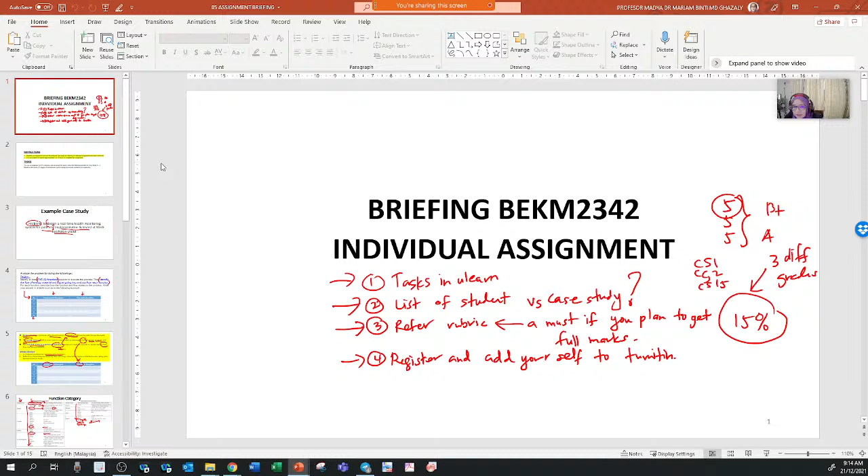So if you look at the example, in the case study there are roughly about 10 case studies. This is one case study I'm going to show you as an example, which is: the problem is to design a real-time health monitoring system for patients, implemented and tested at Klinik Kesihatan UTeM. Apparently, this problem was given to my IDP student, integrated design project student, third-year student last time, before COVID happened.

So basically what it does is I ask the student to design a health monitoring system for patients, which is when they go to Klinik Kesihatan. When a patient normally goes to the clinic, what do they do?

They will check blood pressure, check your temperature, check your oxygen level, and so on and so forth.

So what I suggest the student to design is a system that, when you do all of that measurement, it will automatically be compiled under the patient name. So directly you have a history of data, meaning the clinic kesihatan has the data of everything under the system. So the doctor doesn't need to key in manually and so on. They just put their hand in the blood pressure monitoring, and directly that measurement will be saved to the system.

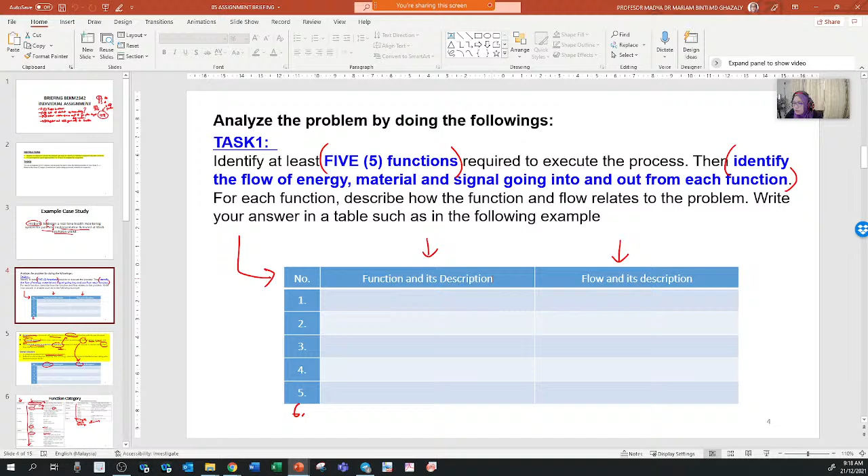So you have a table right here, with a function and description, and flow and description. So basically, if you look at this, okay, this is some explanation.

So what it means by systematic design is that you're not just going to simply design something without organizing your thought, your idea. You need to do it systematically.

Represent all the technical system as a transducer interacting with the world around them. So basically, when we talk about mechatronics, it's about having a sensor that can detect an output. You need to have a sensor, for example light sensor, motion sensor, or temperature sensor, so you can detect the temperature.

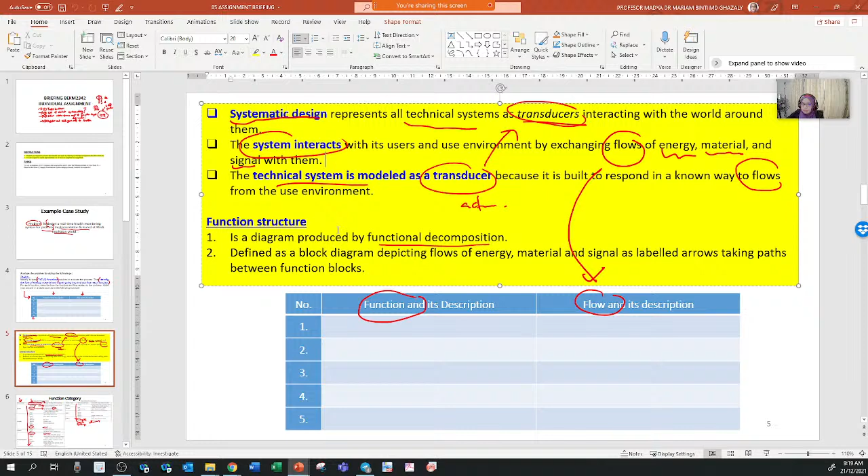So the system interacts with the user and use environment by exchanging flow of energy, material, and signal with them. So all of this is going to interact with each other, and the technical system is modeled as a transducer because it's built to respond in a known way to flow from the user environment.

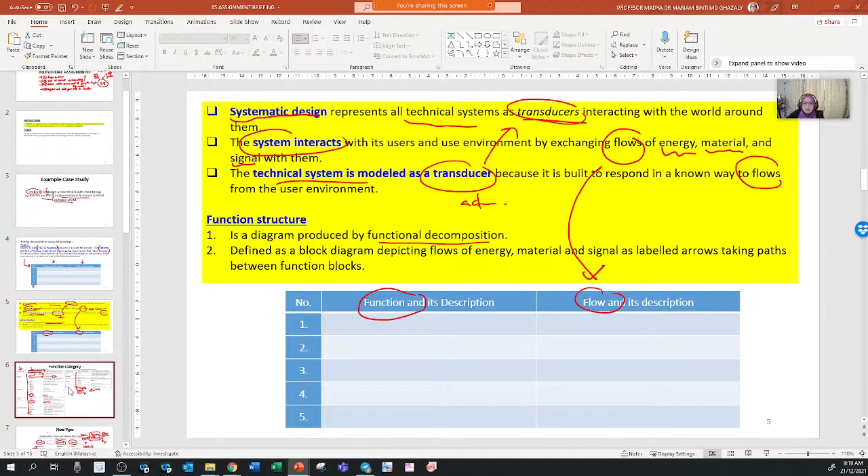So the function structure is a diagram produced by functional decomposition. So basically, what you're going to do is come up with the function and its description, and the flow and its description. So what is it?

So under the class name is like a general term, a general function. And then you have the sub of that class. So you have the basic function name and you have the alternate wording of that basic function. So, for example...

You want to actually convert something, rotate something. So rotate is under the class function of channel. For rotate, another basic word for rotate is spin or turn. So when we talk about rotate, we're talking about actuator. And when we talk about actuator, the actuator needs to start, initiate the actuator movement and so on.

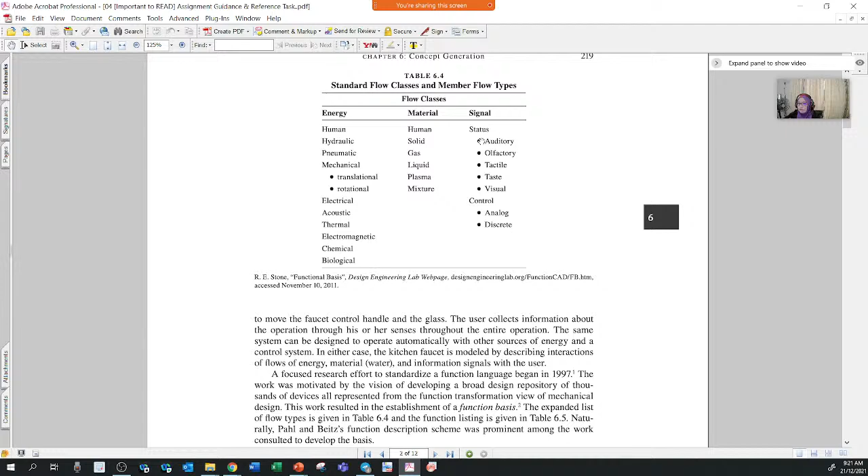So you know there are a few examples of flow classes. We haven't entered yet the type of flow. You'll see that there's flow: energy, material, signal, and so on. And we talked about function just now here.

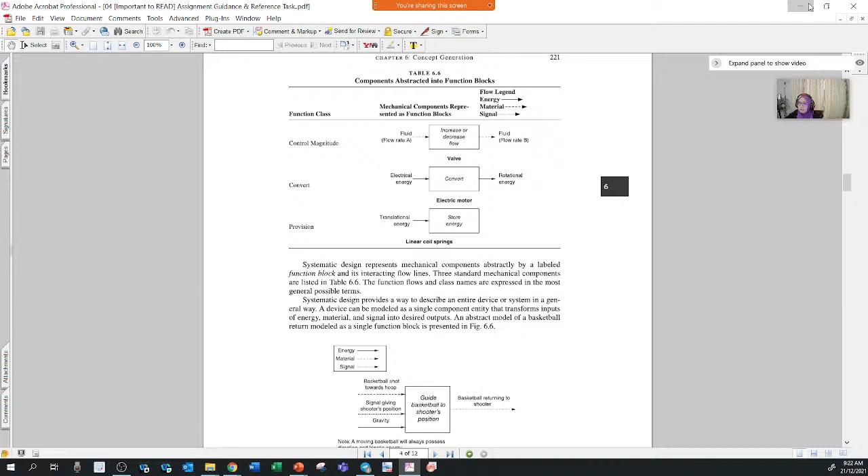So here is how you're going to design the function block. You have the flow just now, and you have the function. Function is the input-output. It's going to move and so on. This is just a brief on function category.

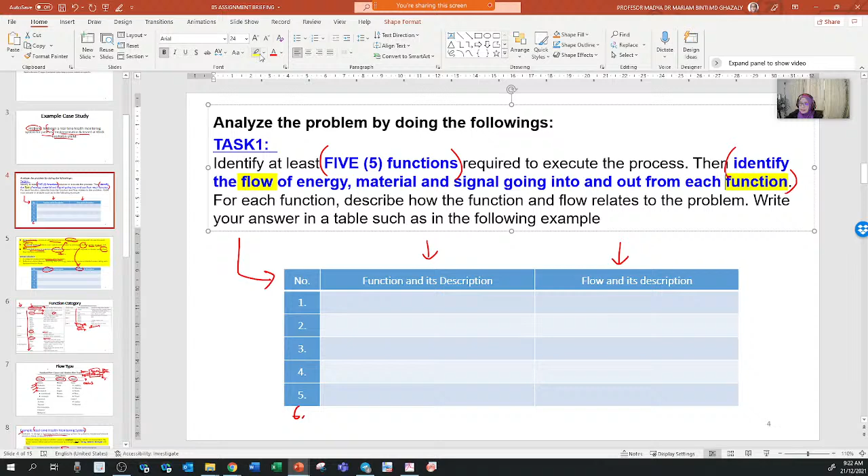And flow type, as you see in the question, is to identify the flow of energy, material, and signal going in and out from each function. So basically you need to determine what is the flow, what type of flow you need, and what type of function you need. So flow is this one, function is this one. What is function? What is flow? Flow has three different examples: energy, material, and signal.

For energy, an example is the one you've learned on actuation. So you have hydraulic energy, pneumatic energy, mechanical energy, and under mechanical you have translational and rotational energy. Electrical is also energy, acoustic which is on the ultrasonic, thermal, temperature, and so on. So all of these are energy.

Based on that, you might have the material. For example, for hydraulic and pneumatic, the material that you are going to have as input and output is gas, compressed gas. For hydraulic it's compressed liquid. So those are the things you need to understand, that there's a relationship between the energy and the material. And the signal is normally the one that you receive from the output from the actuator or sensor. So what is it? Is it tactile, visual, or auditory? Determine that.

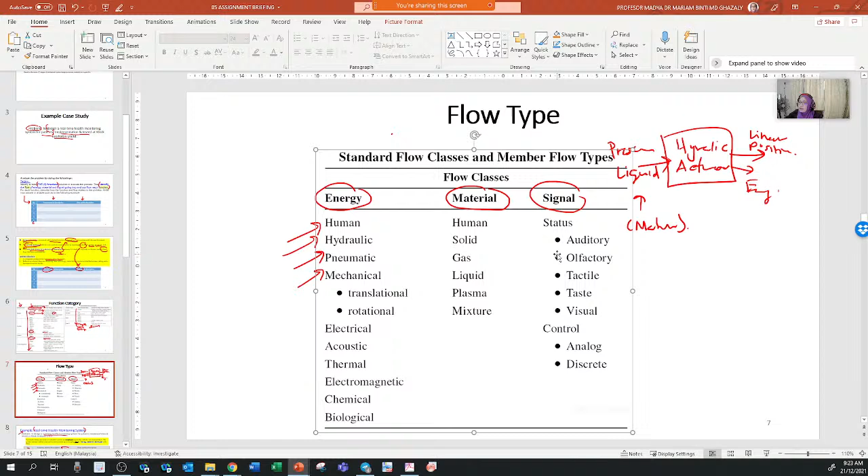So let's look at the example just now, case study: real-time health monitoring system. So what you need to do is determine the function. When you talk about coming up with the function, it's related to the measurement system, actuation system, and control system.

For example, in order to detect the blood pressure, what sensor do you need? Do you need any signal conditioning? If the signal is too small, what do you need to amplify it? And data presentation - what do you need to actually monitor the data? You need a display, or for example, the raw data you can collect later and plot it as a graph. So measurement system, data presentation.

And for the actuation system, for example, in the case of this case study, mostly there's no actuation system. So actuation system, we have that - we have the pneumatic.

Okay, since you have the blood pressure, you know that you are going to pump it and then make sure it's going to grip your hand. So you have the pneumatic actuator there, and compress the air. And next is control system. So you need a control because the blood pressure machine needs to control - basically, when it detects the maximum, then it will stop and calculate the blood pressure.

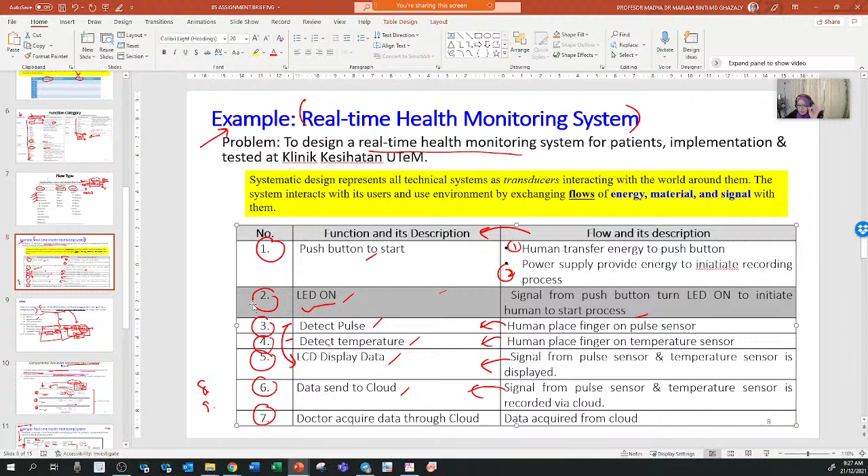Okay, and so based on that, the second question is to design the functional block diagram. So design the functional block diagram.

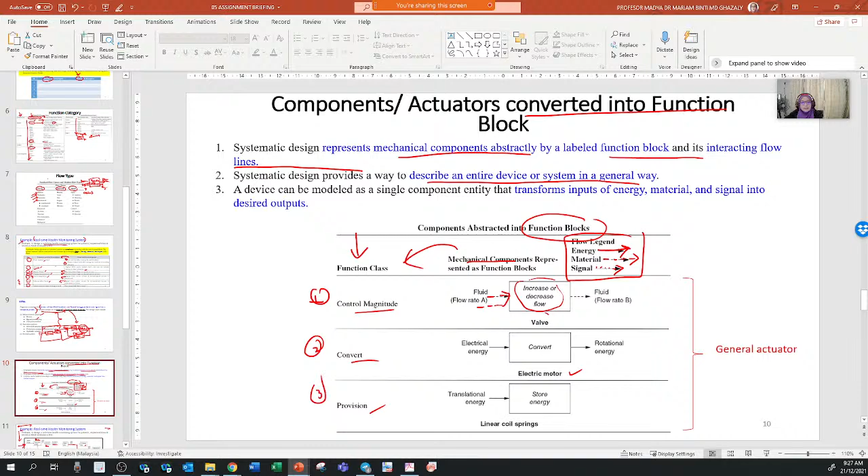If you look here, I'm not going to explain it fully, but you need to read through the PDF that I gave you - read it all until finished, all 12 pages. After you read through, you will understand how to actually come up with the block diagram later on. So this is one. Next is, after you draw the block diagram for the individual block diagram, then you're going to draw the full block diagram. Full block diagram is after you combine everything.

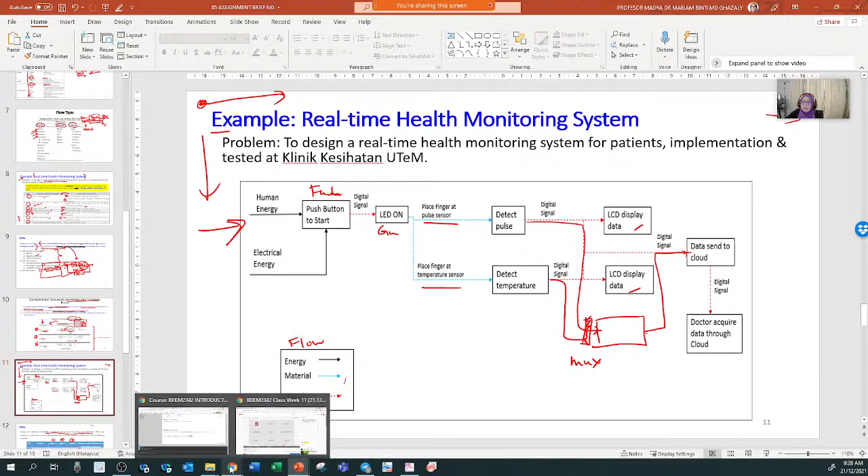Okay, so same goes for this example. Actually in this example, you see that initially they draw the block individually like this, and then later they combine it into this large block diagram. So this is how you need to represent the block diagram later on. You can draw it one by one, up to you, and then you can combine it and come up with the combined block.

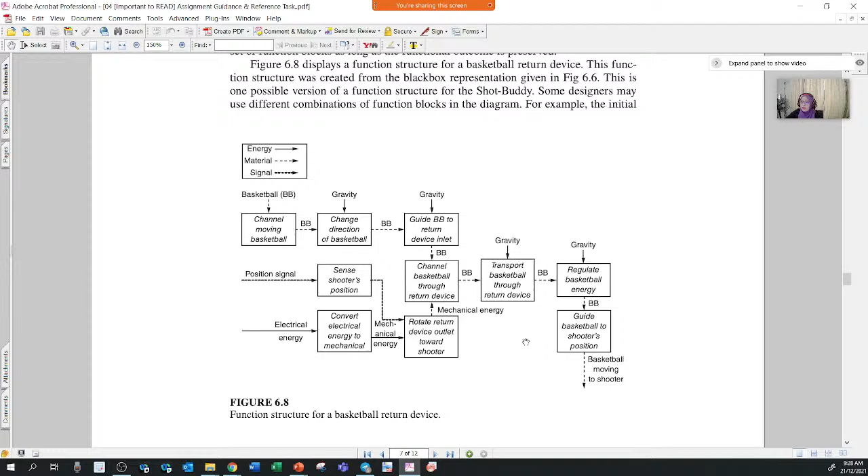Okay, task number 3 is to analyze the suitable mechatronic component to perform each function. So when you are answering this question, it's going to reflect to task 1 and 2. That's why task 1 and 2 is important, that it needs to reflect to what we have learned.

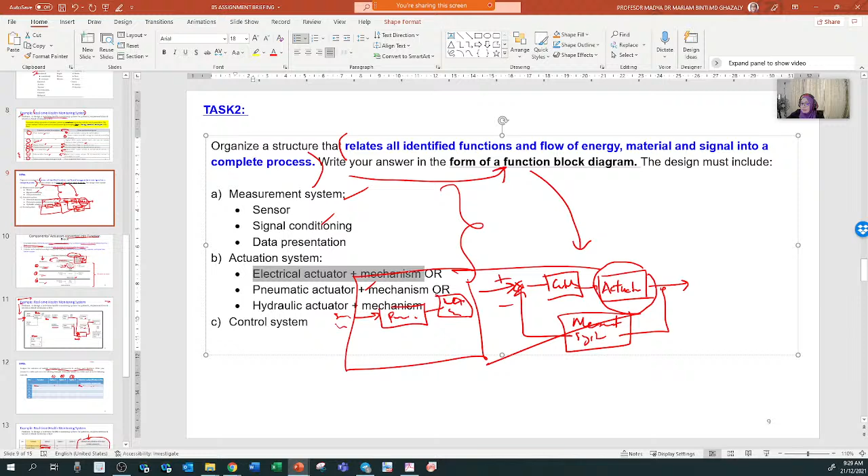So option 1, 2, and 3 is basically the option of example - option of sensor, what type of sensor you need to use, or what type of signal conditioning you want to use, or what type of data presentation, or if it's talking about actuation system function, then what type of actuator you are going to use, plus the mechanism. Don't forget, in the actuator system, you always need to combine it with mechanism - so think of what mechanisms are required.

Okay, and after you list all 3, then justify between 1, 2, and 3, which one is the best and why. Don't answer which one is the best because of cost - don't take into account the cost or the price. Take into account why it's important in terms of the sensor or the structure of the component.

For example, if you talk about a sensor that can detect obstacles, you might want to have infrared sensor, ultrasonic sensor, or light sensor for example. So which one is the best? Why do you think it's the best? You want to explain that.

Maybe it's because of the material of the object. For example, if you have a water bottle, can an IR sensor detect this obstacle? Does it reflect or not? Think about that and justify it. You can talk about the material. Perhaps suggest that if it's a different material, it's best to use an ultrasonic sensor.

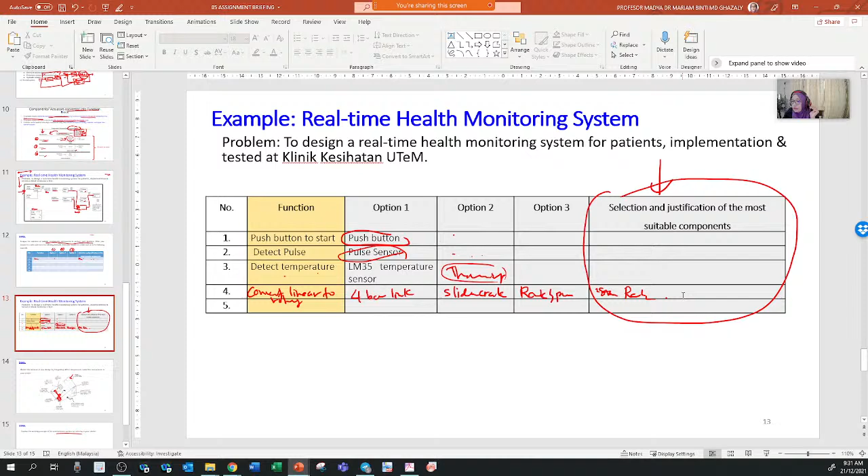This is just an example. If the function is to convert linear to rotary, that's number 4 - ignore 1 to 3, I'm talking about number 4. So do you want a four-bar linkage, option 1, or do you want to use a slider-crank mechanism, or a rack and pinion? Which one do you think is best for your system or design?

Task number 4 is that you are going to draw out the component. Let's say you have all the components - you are going to label everything, where the sensor is and so on. If there is a mechanism involved, draw out the mechanism, and also draw out the actuator if you have one. It needs to be clear how the actuator and mechanism are connected, so your design is clear.

The reason this is important is that in the final exam the question will not be similar, but if you manage to answer the assignment, I'm sure you will be able to answer the final exam later on.

Lastly, task number 5 is to explain the working principle of the system. After you have designed it, explain everything about the options and sketches of the design, then explain the working principle. You can explain it using numbering - number 1, what does it do? When the sensor detects this, the actuator will do that, and so on. You explain it based on task number 4.

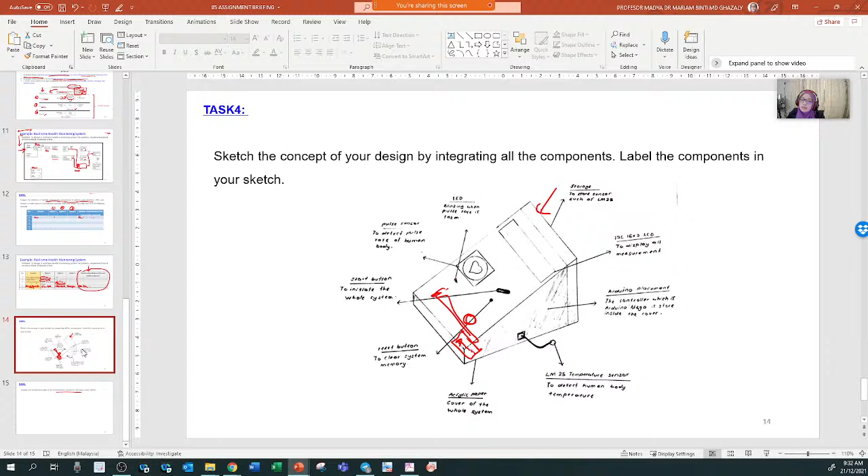So, any question? Any question? No? Hello? Okay, no question, then it's okay. So everything is clear.

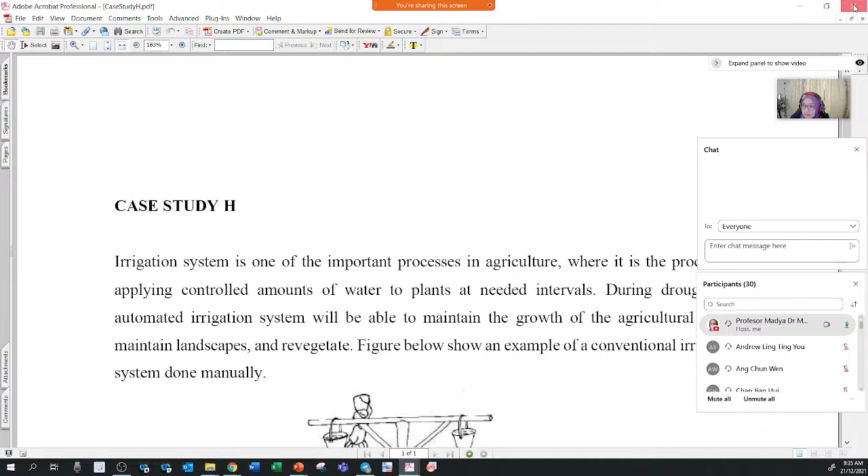Because the question is, of course, if we give you the case study, for example... let me see. Okay, remember this example? I think you've seen it before - I shared it in class during week 1, 2 or 3. I gave you one case study and also a video. This was actually taken from my final year project student. He did a project designing a wearable automatic lower limb rehab system. So the case study is doing that.

So what you need to do is make the system have the following specification.

Okay, so you need to have the mechanism where at the sitting position. Why is it important to explain that? Because I don't want students to think the patient is going to stand up and do the exercise. No, that's not the idea. The idea is that the patient needs to rehab their lower limb, so they need to sit down and do the exercise to the foot there.

Okay, and of course the wearable system must be light, but that's just additional information. The important thing when you look at the requirement is to think about what are the sensors, what are the measurement systems required.

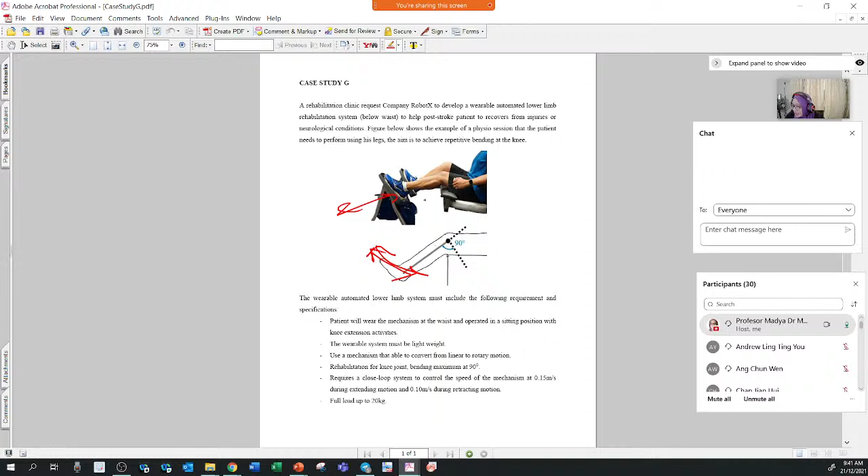This leg will move up like this, in an angle of 90 degrees, so it's going to rotate 90 degrees. Even though it looks like it's doing a linear motion, we are not talking about linear motion right now - you need to follow the requirement that's being asked.

So read carefully, and when you read the case study, imagine that you are the person or the patient, or if you have another case study, then you are the person that has the problem and wants to solve the problem. So what type of sensor and actuator are required? In order for you to do that, you need to be able to explain the working principle of the system overall.

So just now I explained that I'm going to push my foot at an angle like this, rotation. It's going to rotate 90 degrees like this, with the speed of the value given. So it does rotation. You know that for stroke patients, they cannot control their feet because of the stroke, so the machine will help the muscle to actually rehab and improve itself. That's why it's very useful for rehab patients.

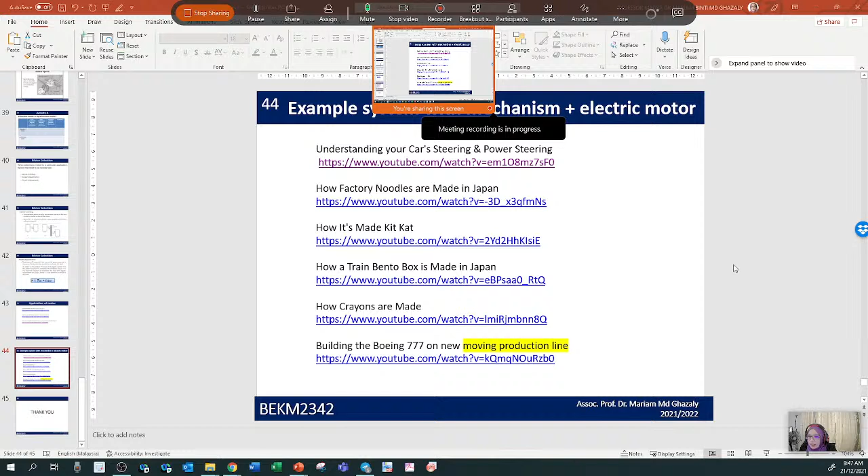How it's made. I'm not sure for you guys, but I like to watch documentaries at home. I have Astro, I don't have Netflix. I haven't even finished watching everything on Astro. But I like to watch documentaries, most of the documentaries are how it's made, big machines and so on. So I hope you guys are also similar, being an engineering background, you need to have that passion of watching all those types of videos. If you don't have that passion, I'm not sure how you're going to work later on, because you need to understand, maybe you're not going to work in that field later on, but you have an idea of how the mechanism works.

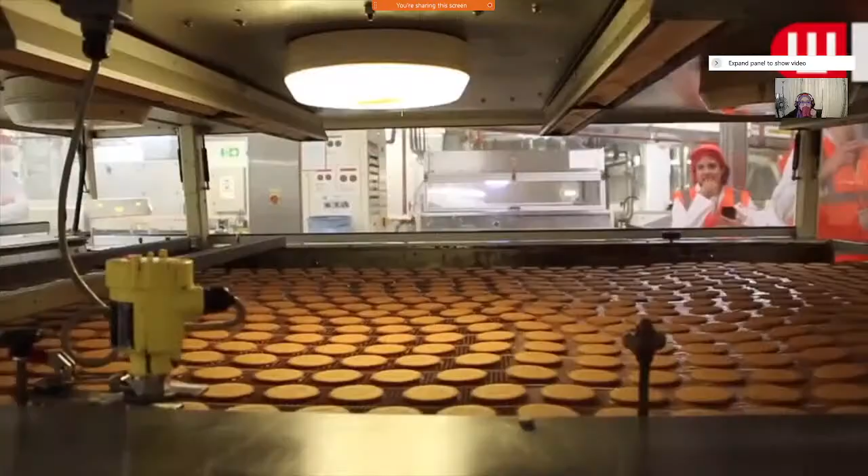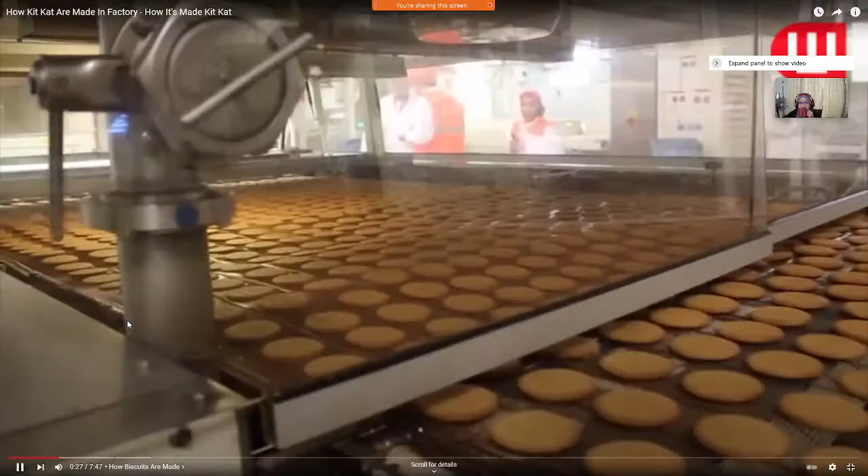Ni biskut. Sorry. Macam mana pula? Biskut dah. Okay lah. Memang biskut pun.

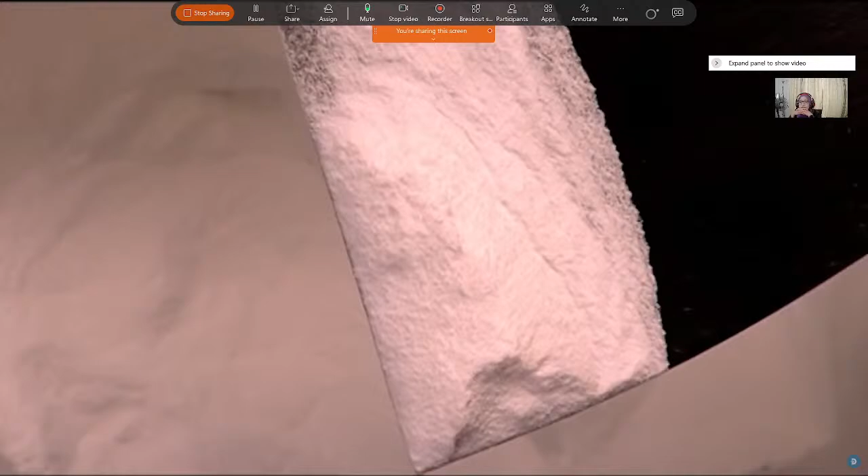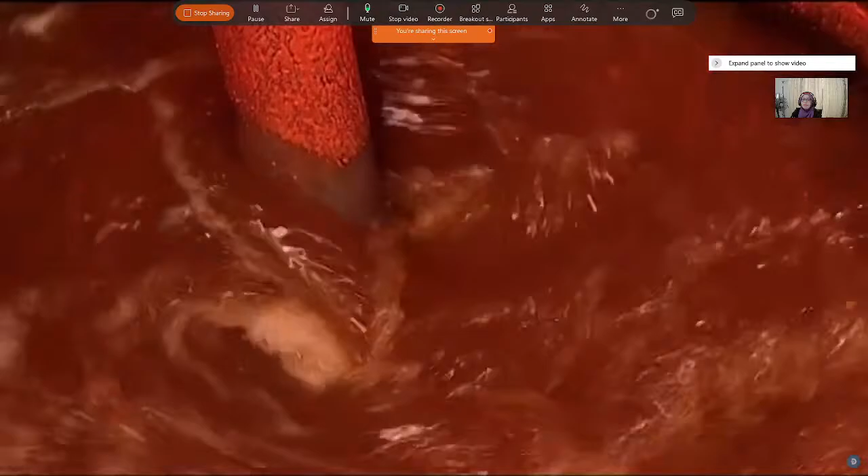These crayons are made from a combination of waxes, primarily paraffin, which is ideal because it's inexpensive and easy to melt. It also has a nice rub-off, meaning it leaves enough wax on the paper. The wax is melted to 62 degrees Celsius. Then a secret powder is added to strengthen the crayon and act as a filler, boosting the number of crayons the wax will produce. Various synthetic chemicals are also added: one to keep the wax from sticking to the mould, and a fatty acid called stearic acid to improve the rub-off.

Now the wax is tinted. In this case, the addition of yellow and red produces orange crayons.

Okay, a tip when you watch this type of video: try to think about what type of actuator is being used, what type of mechanism, what type of sensor, okay?

This factory can produce 127 different colours. Every ingredient in the crayon is non-toxic. After adding more wax, the mixture is blended for about 45 minutes.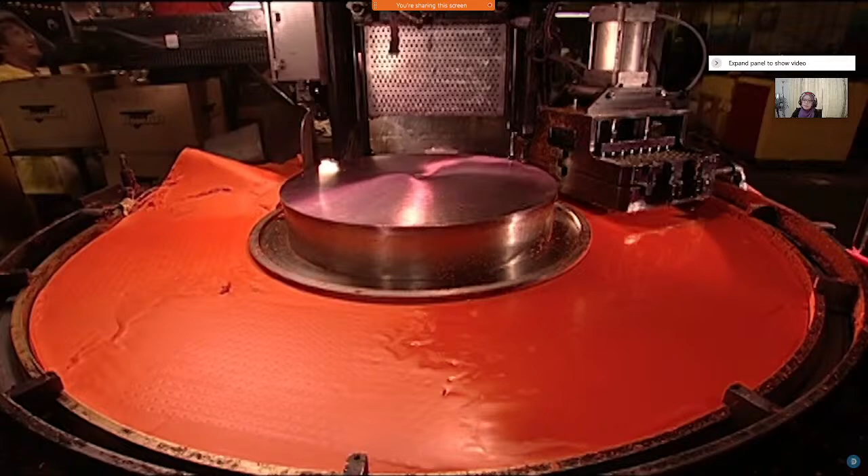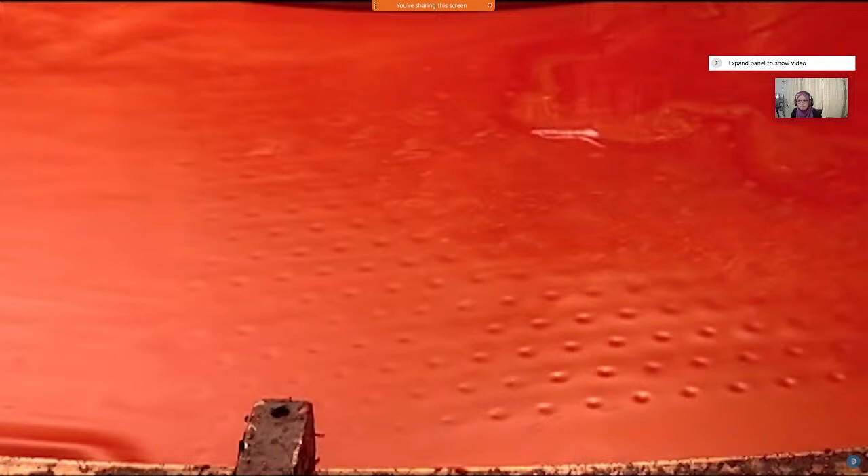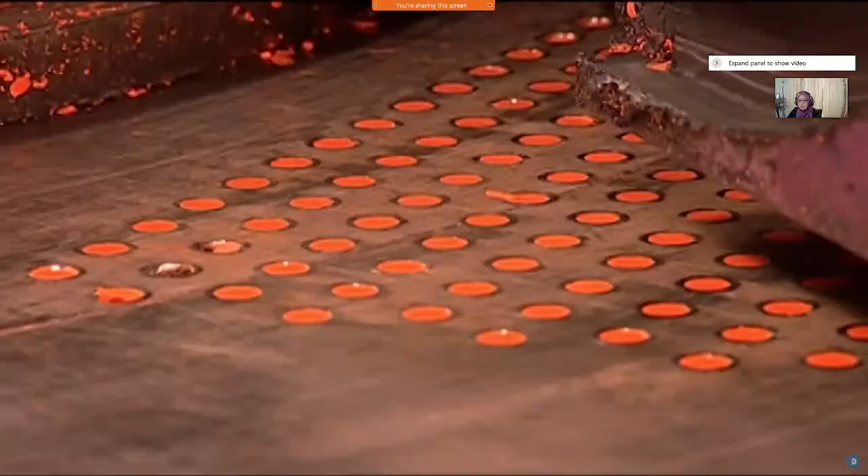Now the wax is pumped into this device, called a rotary machine. It first injects the wax into crayon-shaped moulds. Then it envelops the moulds in cool water, hardening the wax within 60 seconds. As the moulds continue along the circuit, a blade scrapes off the excess, which gets recycled. Just one rotary machine moulds more than 2,700 crayons per cycle. With several machines operating simultaneously, this factory churns out 30,000 crayons every hour.

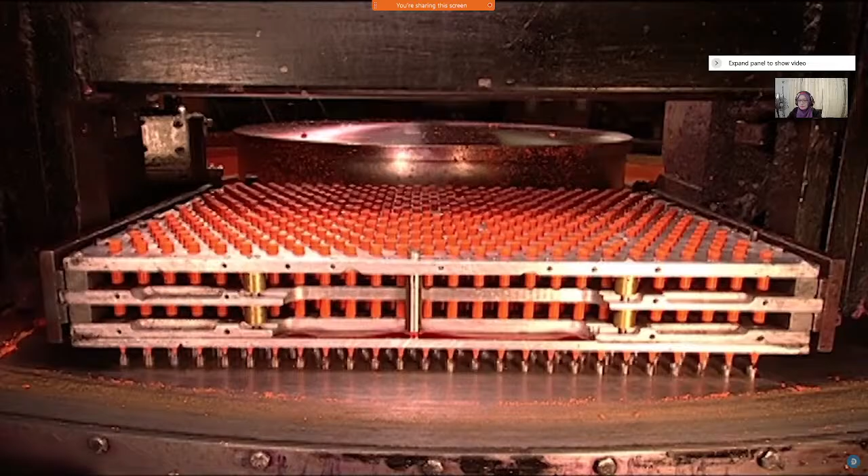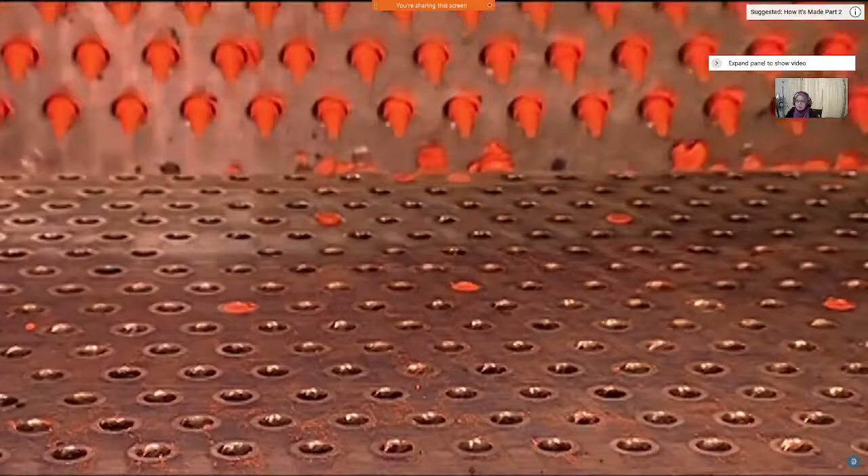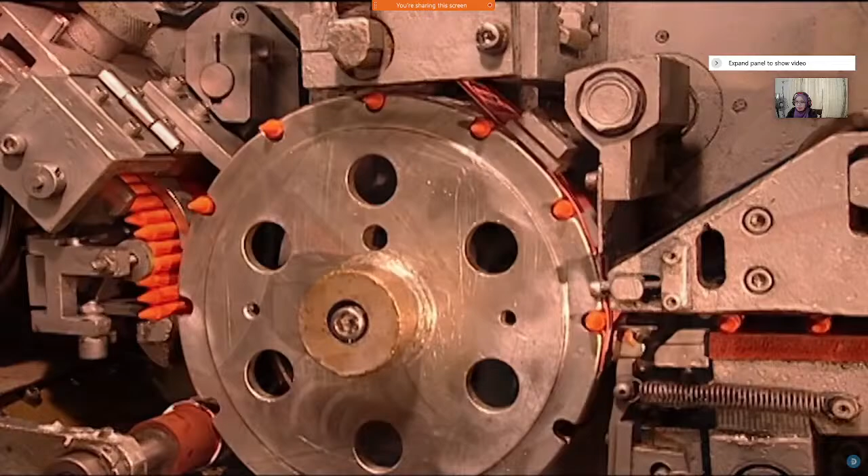The machine ejects the crayons, and a conveyor transports them to the labelling machine. Look at what type of mechanism, what type of actuator is being used. One by one, they drop into the grooves of a revolving drum. At the bottom, glue coats the surface in between the grooves, just before the crayons go in.

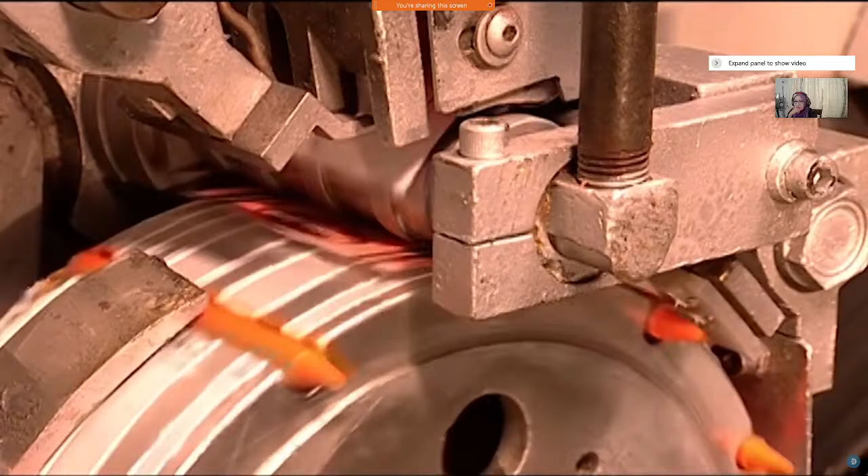The machine then slaps a label onto each crayon. A roller presses the label against the adhesive. Then a small arm wraps it around the crayon. This machine labels 8,500 crayons per hour.

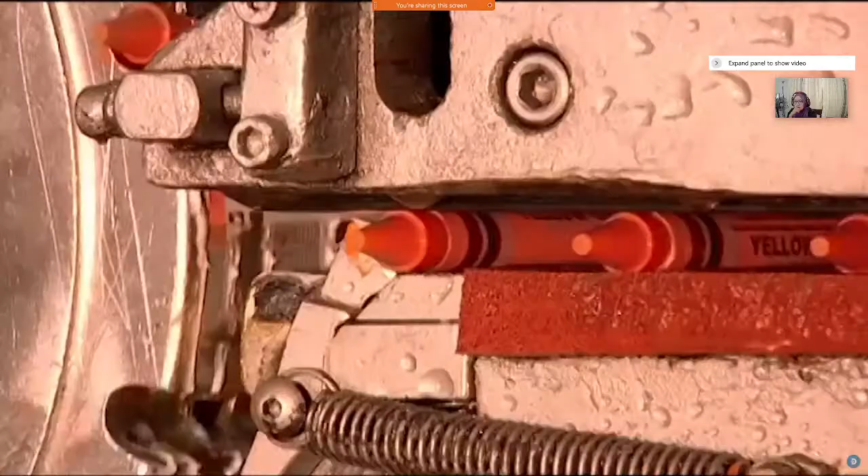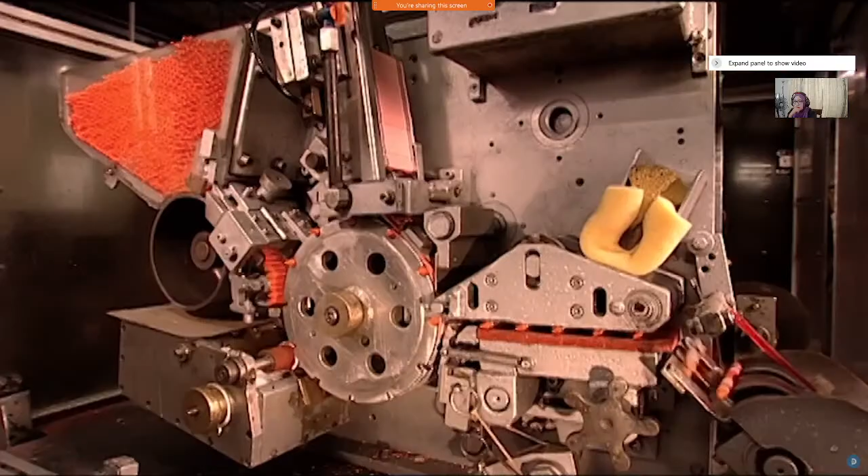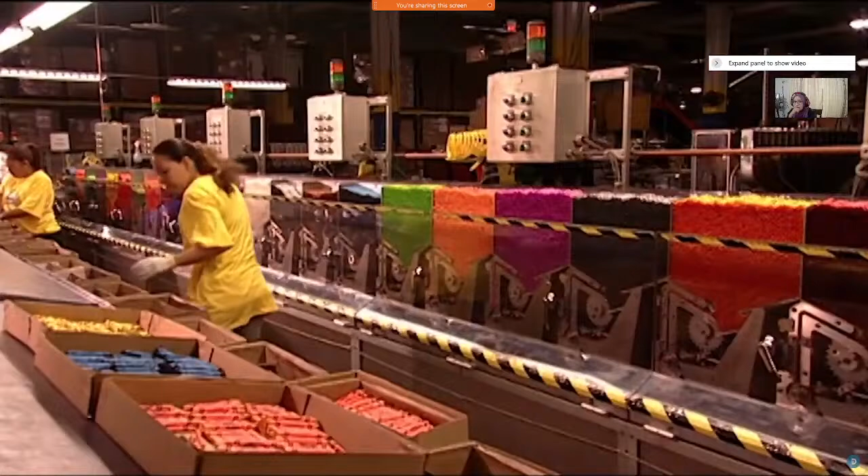The crayons exit the labelling machine and land in a box. They're sorted according to colour into the appropriate hoppers of the packing machine.

The packaging line is entirely automated. The factory programs the machine to collect a certain number of crayons in specific colours, according to the type of packing production you need to have. A sensor is used to count. Best sellers are packs of 16 and 24.

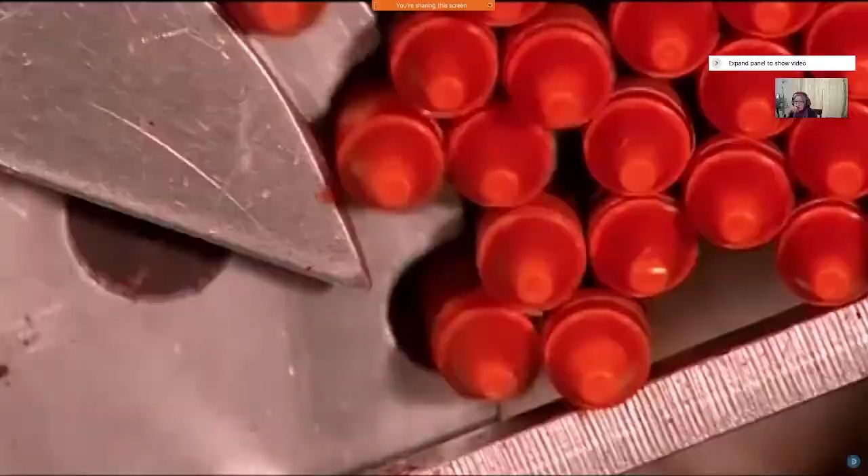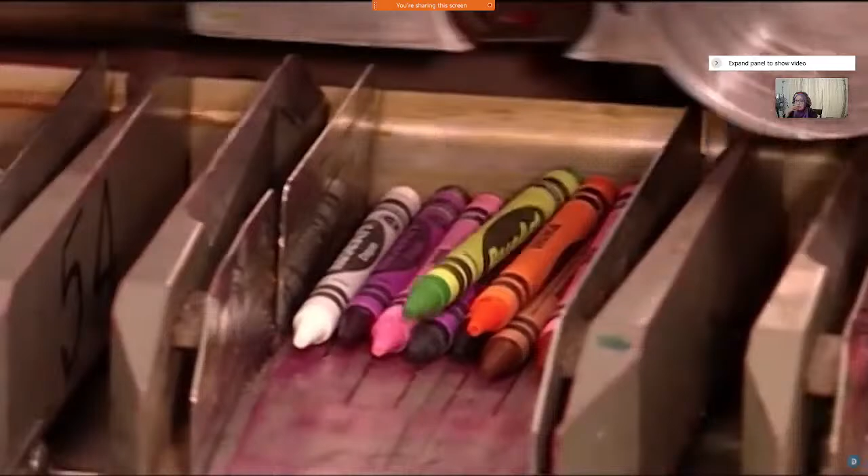The packing machine is designed to handle the crayons gently. Occasionally, though, a crayon does crack or a label comes loose. When that happens, a sensor automatically stops the machine and a light goes on above the problem hopper. The jam is cleared, then production resumes.

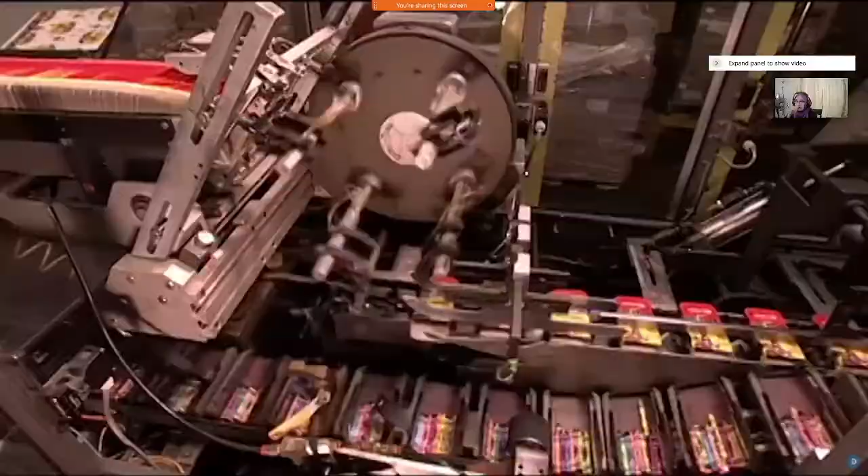Once the count is complete, the crayon line and the box line meet. A pushing device slides each set of crayons into a box.

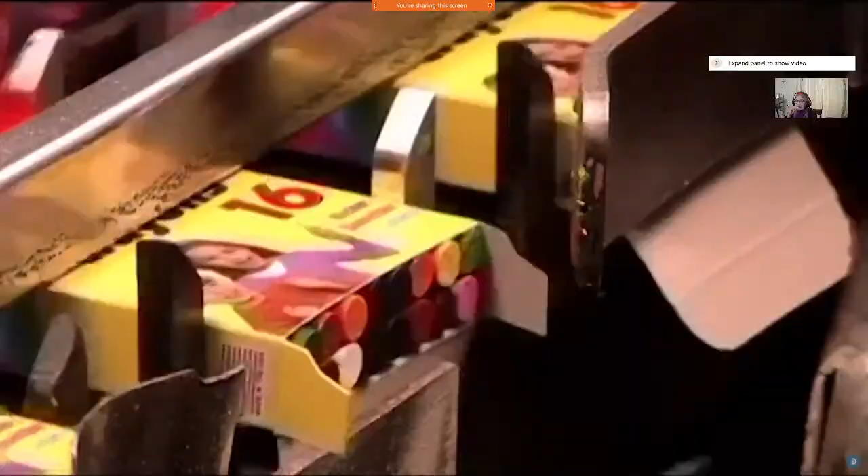A built-in scale weighs every box. Should one be underweight, the machine automatically blows it off the conveyor belt. Then the missing crayon is added manually, ensuring a full complement of colours.

Alright, so based on that video, lots of actuators. You can find that there are lots of actuators being used. So what do you think? What are the actuators being used in the video just now? You can write that in the chat. What type of actuator, not the mechanism, actuator only first. So what type of actuator do you think? Write that in the chat.

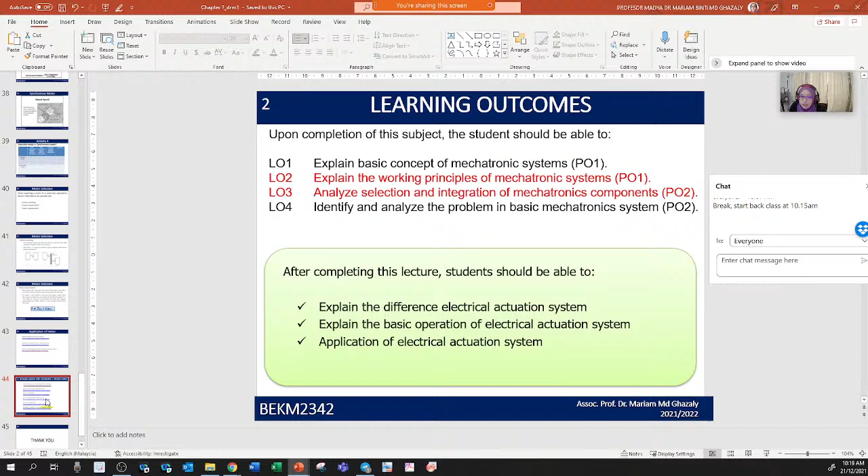Types of application that I mentioned just now—one of it was the crane. A crane, most of them are hydraulic, but maybe it can use an electrical motor. It's up to the company to use, but most of the time they will need the torque. If they want a larger torque because of the molding process and so on, they prefer pneumatic and hydraulic. And the one that I showed, which is much more relevant, is power steering.

Power steering uses the mechanism plus the electrical motor. If it's normal steering, manual steering, you have only the mechanism. That's why without power steering, the car is really heavy—very heavy to steer. So if you have an electrical motor or hydraulic actuation in that car system, it's easier to actually handle the steering.

Back again to this—just a recap. You have covered the measurement system, and in the measurement system you have learned about the sensors, and also the signal conditioning, and also data presentation. So data presentation, where is it? Normally, data presentation is after the signal conditioning. So it might be that you are going to save the data, or you want to display it somewhere.

For the actuator system, you have the actuators—hydraulic, pneumatic, electrical—and you might ask, where is the mechanism? The mechanism is also included here under hydraulic, pneumatic, and electrical. And in order for the actuator system to detect the signal from the controller, you might have the digital to analog converter, or digital to digital converter. It depends on the system—sometimes you want to change the sampling time.

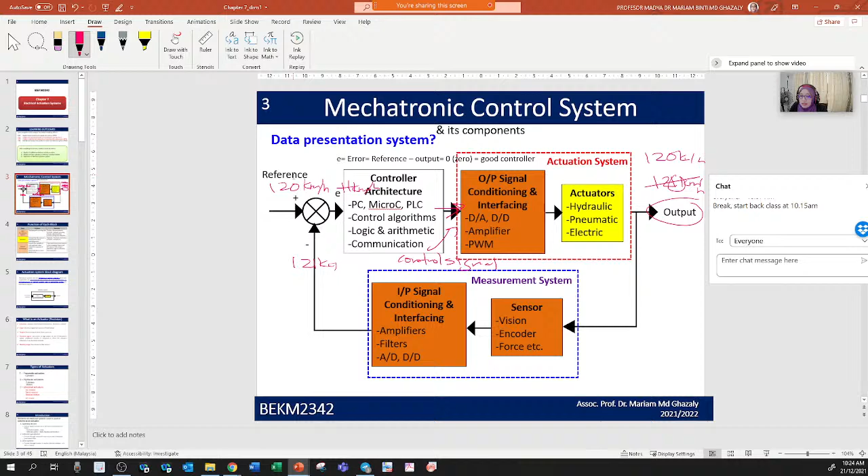So we talk about the input for a closed loop being the reference. We'll jump that part, just recap it, just read it.

So we go to this part: types of actuators. We have covered the pneumatic actuator and the hydraulic actuator. Now we are under the electrical actuator. Under electrical actuator, we are going to cover the 4 main components that we have. Of course, under this component we have other stuff also, like the brushless DC motor and so on. But these are the common ones people talk about, and as a student you need to understand the difference between DC motor, servo motor, stepper motor, and also AC motor.

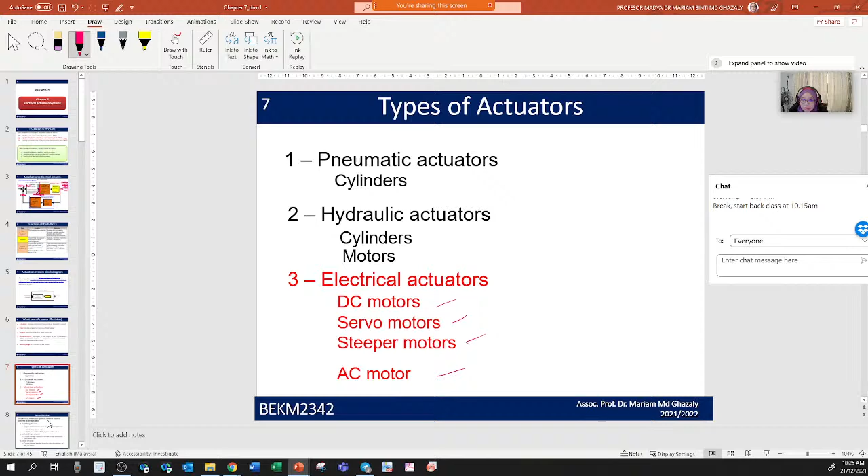So first, we go to the elements of electrical systems in control systems. We have three types of elements. The first one is switching devices. Switching devices are something you normally see in a simple system, acting as control signal switches to turn on and off some electrical devices. Example: relay using solenoid, mechanical switches, so it's going to control on and off.

And sometimes when we talk about relay, if you are going to learn PLC, programmable logic controller, they also have a relay but in terms of a program ladder diagram. That's why nowadays, when we talk about electrical systems, if you want to control something easier, you apply a PLC system, a PLC controller.

PLC controller, the one that you see, for example, in a washing machine. You have a PLC controller. In a vending machine, you have a PLC controller. And also traffic lights, you have a PLC controller. In Malacca, we have lots of traffic lights with countdowns. So when we have that countdown, you actually have the PLC controller automatically, because it's going to count down.

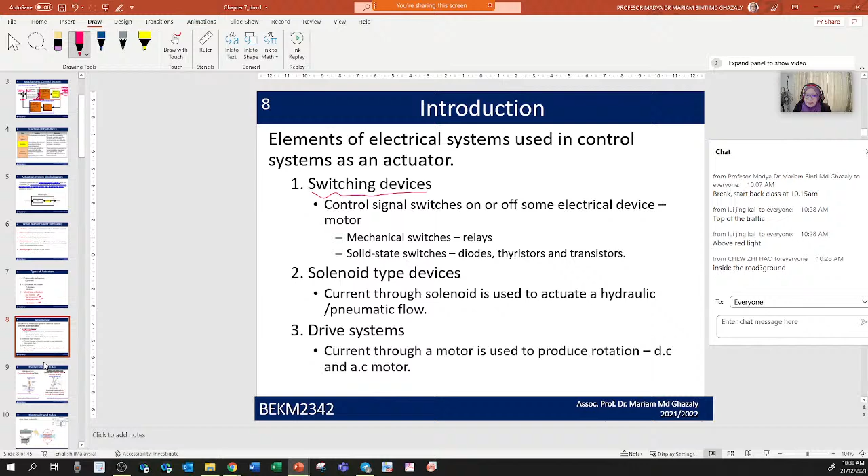The third one is the drive system, which is basically to make it rotate or move in linear motion. It can be DC or AC. Before we go too deep into the types - DC motor, stepper motor, and so on - this is just a refresher on the hand rules.

You guys can go watch the video, but I'll directly explain the hand rule. We have the right hand rule - most of you know this. It means that if you have current flow moving up, your thumb is the current direction. So you put your four fingers around the wire, making sure the thumb moves in the direction of the current. This means the direction of the four fingers is the direction of the magnetic field. That's the basic concept of the right hand rule.

Current versus direction. When we talk about actuators, it uses a combination of the right hand rule and Fleming's left hand rule. Fleming's rules have two types: Fleming's left hand rule and Fleming's right hand rule. What's the difference? You previously learned about Fleming's left hand rule, which is for the motor. For Fleming's right hand rule, you use the right hand but with the same three fingers, and it's for the induced current. So what does that mean?

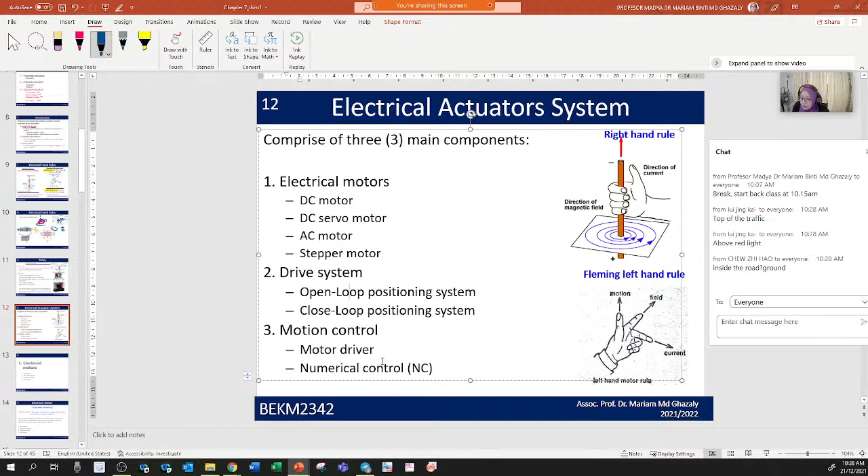And for the third one is motion control. So basically, you can either want to control the motor using a motor drive or a numerical controller like PLC, just now.

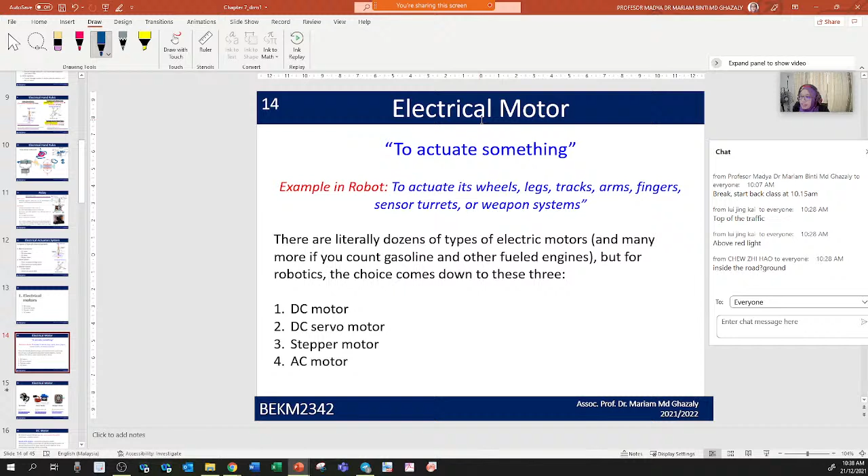Okay, so let's go to the first one, which is the electrical motor. So just read through it here. Electrical motor means that to actuate something, same goes to pneumatic and hydraulic. So these are the three main

motors that you need to know as an electrical engineering student. So you have DC motor, servo motor, and stepper motor. So, what is the difference? My question is here, okay, for DC motor, we have 2 wires.

For servo motor, we have 1, 2, 3 wires. For stepper motor, we have 1, 2, 3, and 4 wires. So, what is for DC motor?

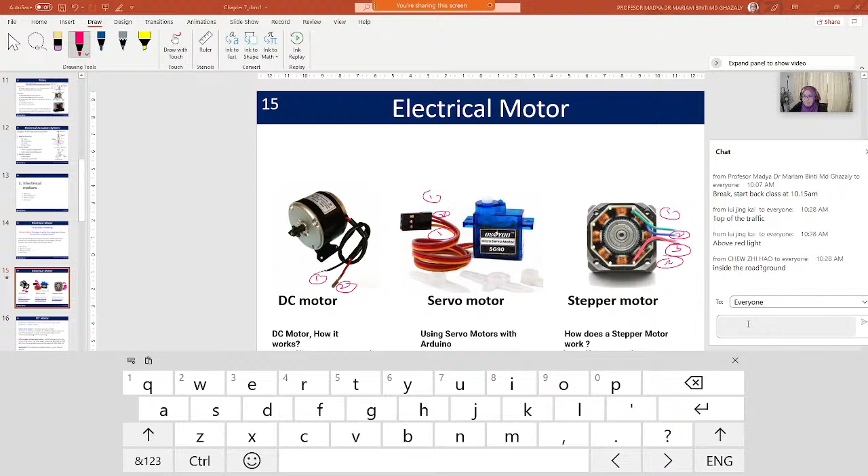Can you write that in the chat? What is the represent of the wire for the DC motor?

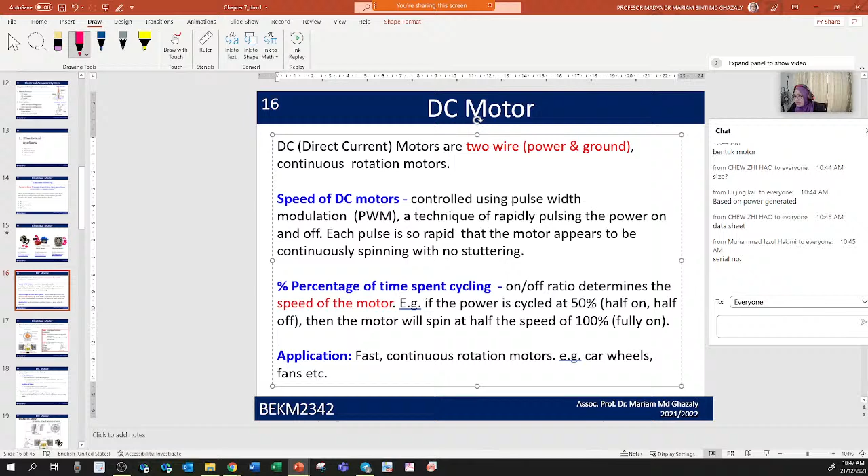An application example is a fan at your house. You have the fan at different speeds. So how does your fan actually change to different speeds? If you want to know more, Google it - how does my fan work? Basically somewhere in your fan there's a potentiometer that can change the speed depending on the ratio of the cycle. So it might be 100% for maximum speed fully on, and 50% maybe at the third level or second level.

When we talk about shaft and bearing, that's already in the mechanism part. You have the shaft and bearings - ball bearings. The shaft will normally be connected to any mechanism - you might connect it to gearing, or to a pulley, lead screw, or spindle. It depends on how you do the setting, what the requirements are, what output you want.

Let me show you an example of what I'm talking about, the shaft. Notes, chapter 7. Okay, look at this - this one is a rotary actuator, an electromagnetic actuator that was designed by my master's student.

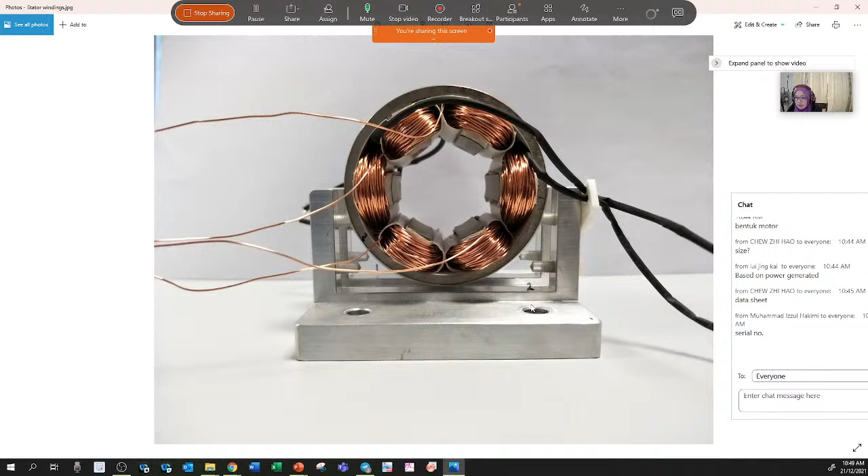So if you see here - maybe it cannot be seen clearly - the outer layer here, the one that has coils, is actually the stator. It is the one that is fixed. And the one you see here, inside, there's a rotor actually. It's going to move. That rotor is connected to a shaft here, this shaft. And this shaft, for this setting, is connected directly.

There's no gearing because we are actually designing the electromagnetic actuator to control precise motion in micrometer displacement. So we connect the shaft here to bearings at each side - we have the bearing here and the bearing here. And the end of the shaft is connected to an encoder or a sensor to read the rotation. So this is what the explanation is about.

But this one is not a DC motor. It's basically a switched reluctance actuator. It's induced based on electric current, and it's going to move without any magnetic field, without magnets. For the case of a regular stator, you have magnets with north and south poles. For the one my student designed, there's no magnet - it's dependent on the coils to induce the north and south pole magnetic field.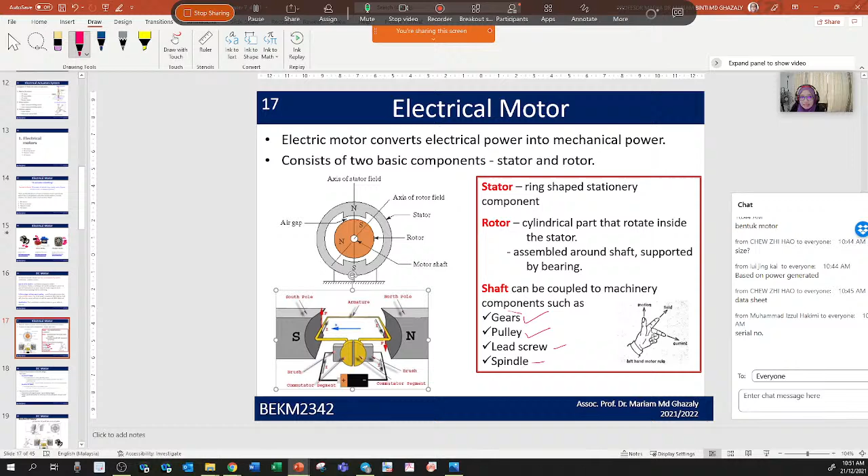So for the DC motor, there are two types: DC brush motor and brushless DC motor. Brushless means it does not have contact. For this example, underneath is the brush DC motor. Brushless means there is no contact between rotor and stator, like in my student design, so it's much smoother.

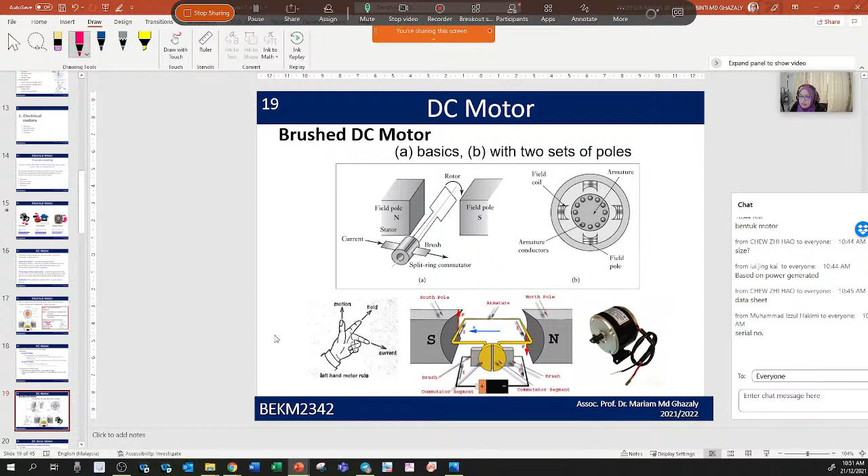Okay, this one you can just go through. Second one is the DC servo motor. It's basically the combination of a DC motor, a gearing system inside, a controller because you want to control it, and a sensor. So this is what's inside the DC servo motor.

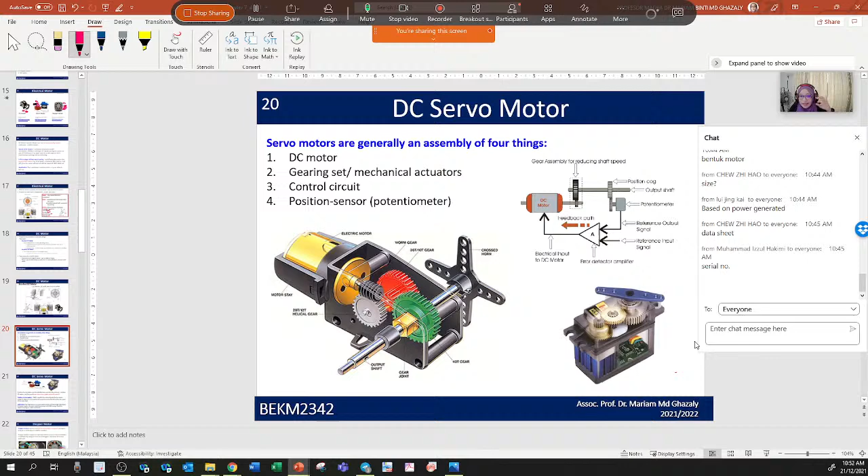Normally if your lecturer gives you a DC motor, remember a DC motor does not have any sensor inside. You need to add an additional encoder or sensor and connect it to the shaft, like I showed in this design. It only has the motor, so at the shaft end, you need to connect it to an encoder to read the displacement. If you don't have a sensor, there's no displacement to be read. With just a DC motor, you can only see it move and rotate, not read the displacement.

So for the DC servo motor, you see this is the DC servo motor. It's connected - the shaft is connected to what? What is this? You have learned this in mechanism.

Any idea? Is it a pinion? Which round screw-like one is this? This one - is it a worm gear? Oh, not the pinion. Not that one. Okay, that's right, it's a worm gear. And that worm gear is connected to a multiple gearing system. So there are these three gears - this gear, and this gear.

And this gear is connected to another shaft, and mostly this end of the shaft is connected to a wheel or tire and so on, and it's going to rotate. So it depends on how you do the setting. Inside this, you have an encoder. So if this is the inner part of the DC servo motor, most of the time you have a potentiometer. The potentiometer is just to detect the reference between the output and the input. So that's on the DC servo motor.

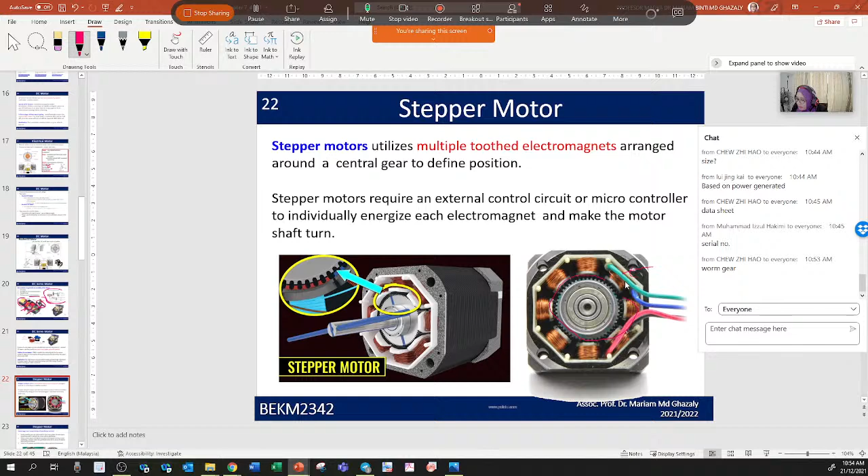Okay, this one just go through. Lastly is the stepper motor. If you look at this, it basically has multiple toothed electromagnets arranged around a center gear to define the position. It seems like what I shown here for my student design, but if you look at my student design, we only have 6 stators - 1, 2, 3, 4, 5, 6 stator. For the case of this stepper motor, you look at this, you have basically 8 stators and multiple teeth on the rotor. So when you induce current at either A, B, or C, it's going to rotate accordingly.

Okay, let me just show you. Look at this diagram. This example of a stepper motor has only 2 phases - phase A and B. So let's say we have this position. You are going to induce current at B, here. What happens is when you induce current, the electromagnetic field will induce between the rotor and stator, and the rotor inside will rotate. So you can see that this red line is aligned with the B point, the red point.

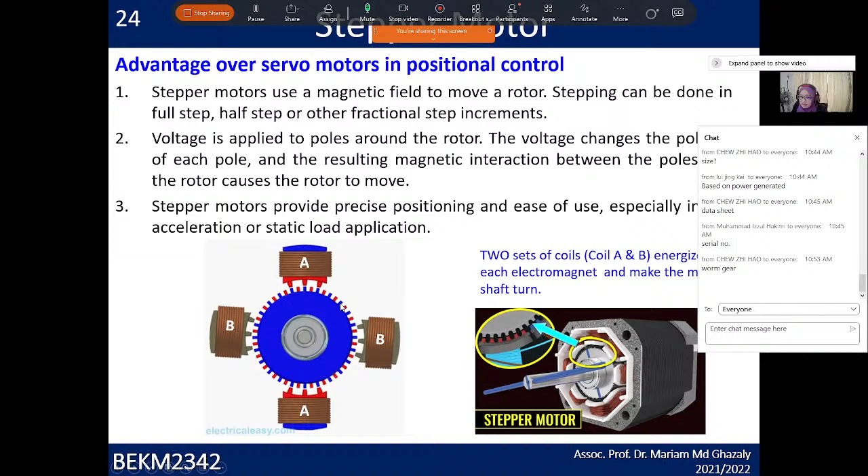And when we induce again, phase A - you see that initially phase A is not aligned with the tooth here, then when you use phase A, it's going to align. So when you keep on giving A, B, A, B, A, B, then this stepper motor will move precisely. This is where you can directly use a stepper motor to control anything in precise mode because of the precise rotor teeth - this is the advantage of a stepper motor without adding any controller.

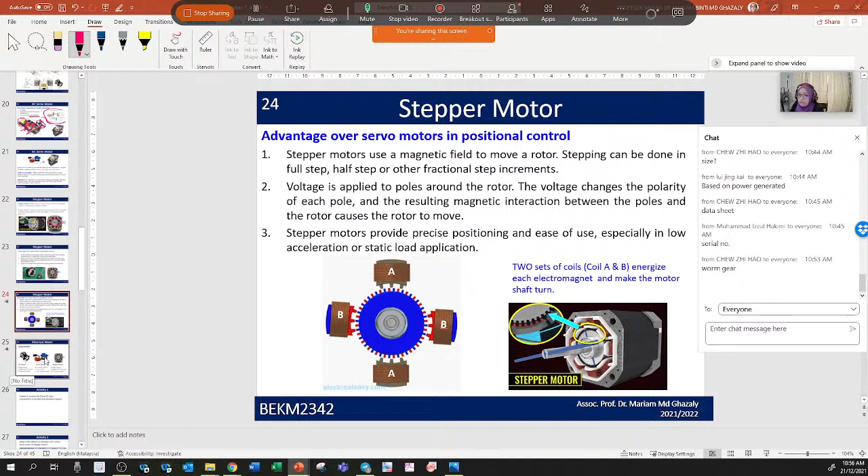Okay, you just control the signal through the stator there. Okay, so those are the conclusion.

Based on that, what I need you to do is activity 4, four activities. Activity 1 is to explain the 3 main components of the electrical actuator from the video, and upload to the Padlet.

Activity 2 is the difference between DC motor, stepper motor, and servo motor. I want you to draw this type of table. Don't use my diagram, find another diagram, and put it here for DC, servo, and stepper, showing the inside part of the motor if possible - the physical components involved.

For DC motor, you have the rotor and stator. For servo motor, what else, and so on. Also cover the working principle - how does it work - so explain a bit. And what are the applications? So that is activity number 2.

Activity number 3 is also in the Padlet, which I have uploaded. What are the differences between AC and DC? I haven't explained AC and DC, but I want you to read through my notes - it's already inside, and you can find additional explanation online. Same thing: construction, physical, working principle, and application, between DC motor and AC motor.

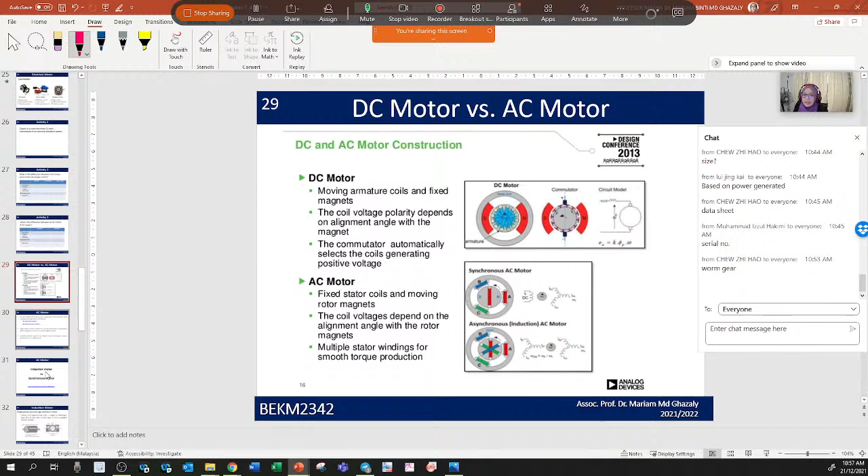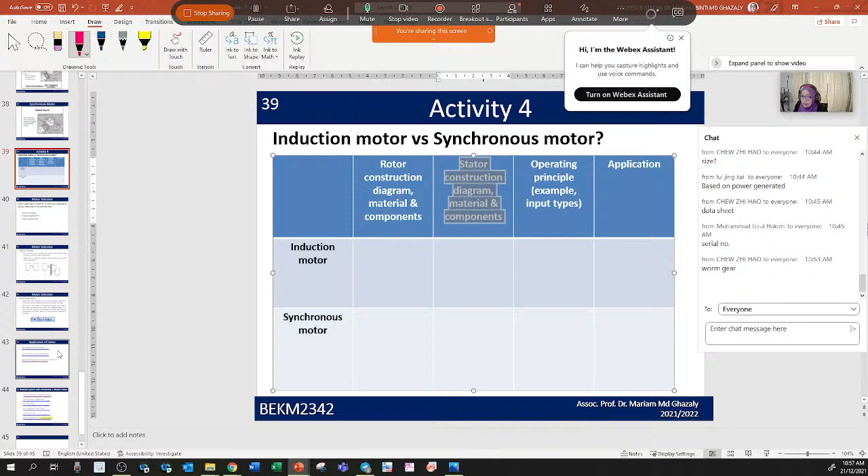Lastly, activity number 4, between induction motor and synchronous motor. List out the rotor construction, the stator construction, how it looks, the operating principle, and application. For activity 2, 3, and 4, it's simple and direct - draw out the table and upload it into ulearn.

Who has done it already? Syafiq has done this. So for the first one is the video - an example of a video is like this student made last time. You take a video and upload it.

So basically, the task is to explain. I do not want the student to just read my notes and explain it - no, I know when you are reading my notes. What I want you to do is explain how you understand it. If you want to explain in Malay, that's okay, as long as you can explain it from the heart, meaning you know how it works.

So upload the video for the 3 different types of components in the electrical actuation system. That will be the activity for this week - 1, 2, 3, 4. You can do it for 1 week, and next week we'll come back and look at it.